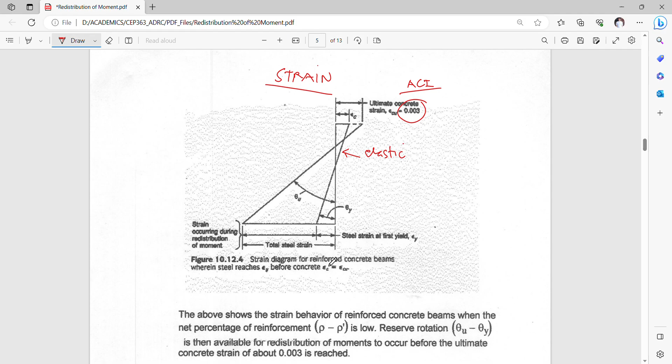So this is the ACI definition of your concrete strain during crushing. As you can see here, this is actually the elastic strain distribution wherein your epsilon c has not yet reached the ultimate value of 0.003, while your steel strain here may or may not reach the yield strain epsilon y.

This point at which your steel strain starts exhibiting the yield strain is actually the start of your inelastic behavior, on which we take note that ductility is measured from the point where this curvature Phi y is defined, and certainly increasing the value of Phi u, such that your Phi u minus Phi y is simply the measure of your ductility.

This is also the parameter used to compute for the amount of redistribution of your moments. So the amount of your redistribution is actually related to your ductility here.

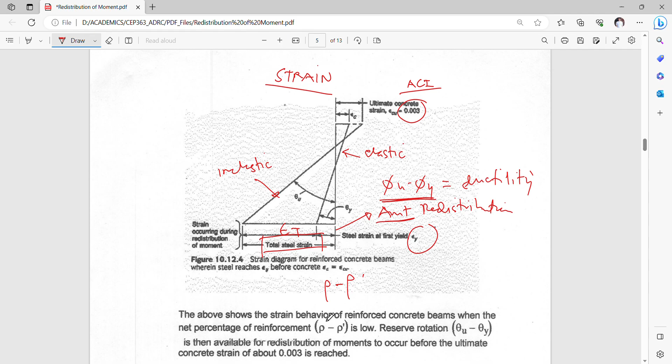Later on I will show you the difference between the two codes, defined on the basis of rho and on the basis of your epsilon.

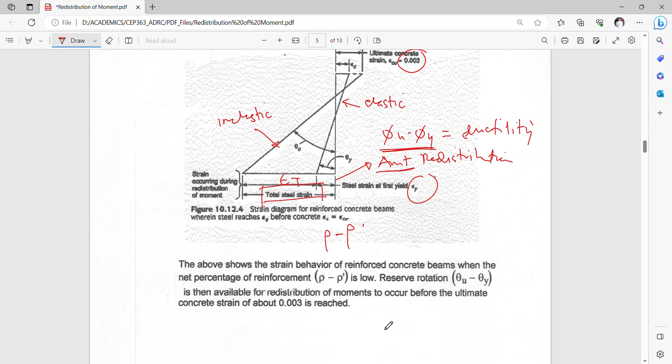So let's go now directly to what the code tells us. I have here two codes: this is an old code, and this is also an old code. The change from this 1999 code to the 2002 code serves as the transition into what you call the unified provision on tension and compression control members.

In these two codes, there is defined, on my previous lecture, a compression control behavior and a tension control behavior. For a compression control behavior, we are talking here more on a column behavior, while on the tension control, we are actually considering a beam behavior. I will be discussing this perhaps on a different video.

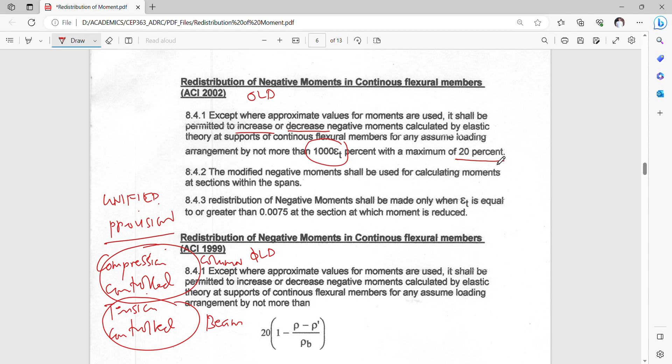Let's take first what the code tells us about redistribution of moments. For your ACI 2002, section 8.4.1, it's stated that except for approximate values of moments used, it shall be permitted to increase or decrease negative moments calculated by elastic theory for continuous flexural members, for any assumed loading arrangement, by not more than 1000 epsilon t percent, with a maximum of 20%. The modified negative moments shall be used for calculating moments at sections within the span, and the redistribution of negative moments shall be made only when epsilon t is equal to or greater than 0.0075.

So these are the criteria for us to be able to use the moment redistribution procedure defined by ACI.

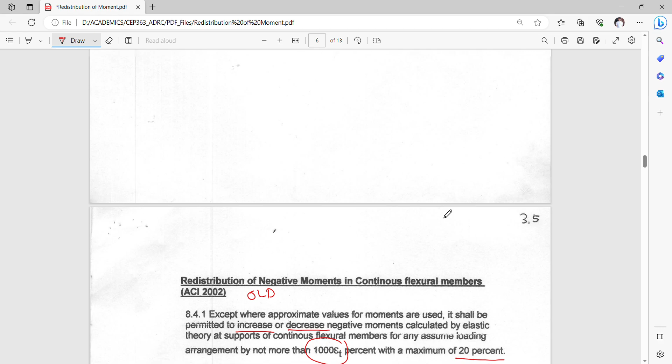In ACI 1999, a few years back, we defined the amount of redistribution in terms of steel reinforcement ratio. This steel reinforcement ratio, defined here as the main parameter, rho minus rho prime, was controlled to be a low value to allow us to redistribute the moment. The amount of redistribution, which is the counterpart of 1000 epsilon t here, is equivalent to this value in percent. So the lower this value, the higher the redistribution percentage.

So which means that we are just trying to make a more ductile design. When the design has a higher ductility in terms of the amount of reinforcement ratio, or in terms of the difference between the yield curvature and the ultimate curvature, then we can allow the redistribution to reach a maximum of 20%.

In this case, if this is 0, then we can allow this to be 20%. Of course, there's no way, but rather there's a possibility that your rho here is equivalent to your rho balance, when you have a balanced design, and your rho prime is assumed to be 0. So when this is 0 and this is equivalent to rho balance, this becomes 1, and 1 minus 1 becomes 0.

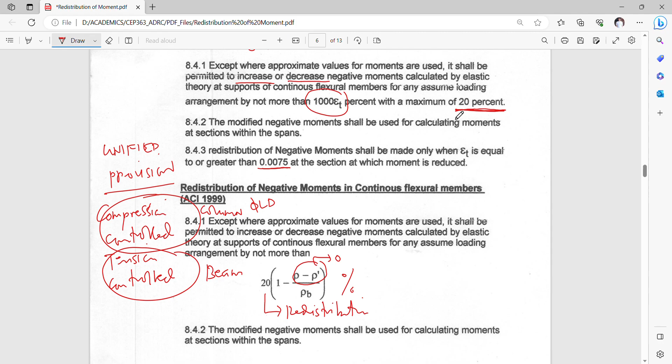So the redistribution of moment then becomes, in terms of percentages, 0. So is there a possibility for this to become 20%? Yes, if your rho and rho prime are the same, this whole value becomes 0, and then this is 1 times 20, so this becomes 20%, which is still the same as the limiting percentage given in our ACI 2002.

So the modified negative moment should be used for calculating moments at sections within the span, and the redistribution of negative moments should be made only when rho minus rho prime is not greater than 0.5 rho balance at the section at which moment is reduced.

So there is a restriction of having your rho minus rho prime to be limited only to 0.50 rho balance. So this is actually a basis of our seismic provision for ductility.

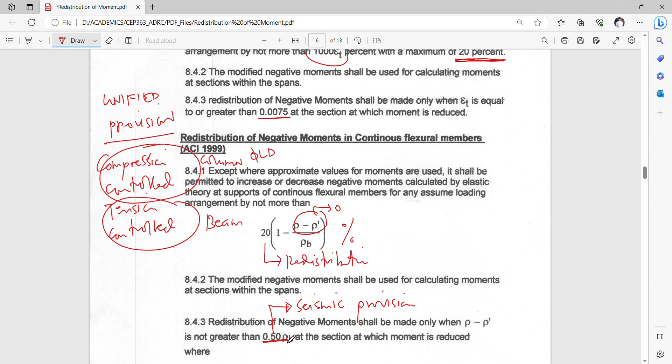So in our ordinary or regular provisions, this is 0.75, but in the seismic provision, we reduce that much more down to 0.50 or 50%.

And take note that rho balance is simply defined in terms of this formula, which is in English units. And for SI units, you just simply convert this to 600 plus Fy.

So we have here a graph of this comparison between codes in terms of your calculated redistribution percentage, for ACI 2002 and 99.

So the calculated available using the formula above, the 1000 epsilon t that we refer to above is simply this two here. So this is the calculated available for Fy equals 60 ksi and for Fy equal to 80 ksi. But for all Fy's and FPU, we can use this graph.

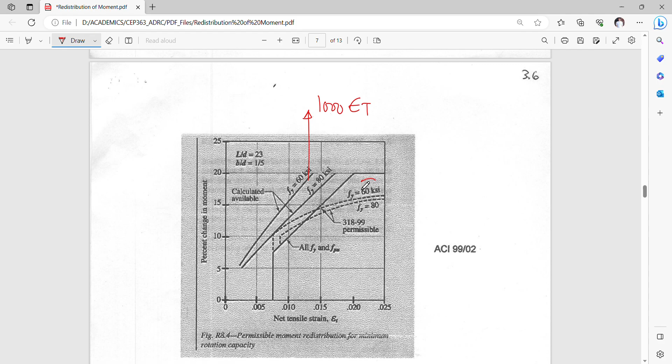But in ACI 318-99, there is a limitation, upon which this graph can only be used within the boundary given by the dotted line, specifically for Fy equal to 60 and Fy equal to 80.

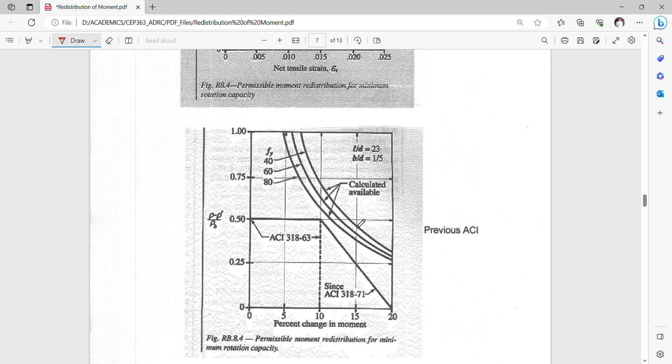So for the older version, ACI 318-71, we have those codes older than 99. So we have the calculated available, which has the basis of this rho minus rho prime over rho balance. So this is now calculated in terms of Fy equals 40, 60, and 80.

So take note that when you have a lower yield strength in terms of the steel, you have a higher curve that will give you better percentages in terms of the redistribution. This percent change in moment is actually the redistribution percentage that we compute using this formula.

For much older version ACI 318-63, we have this graph limiting our moment redistribution percentage only to 10%, and this is limiting our rho minus rho prime over rho balance at 0.50. So again, this is a seismic provision.

And then in ACI 318-71, they actually made some adjustment. So the redistribution may now exceed the value of 10%, and it can reach actually up to 20% when your rho minus rho prime is equal to 0. This can only be 0 again if your rho and rho prime are equal.

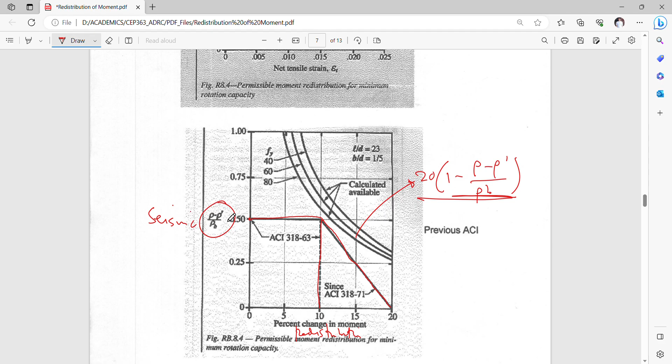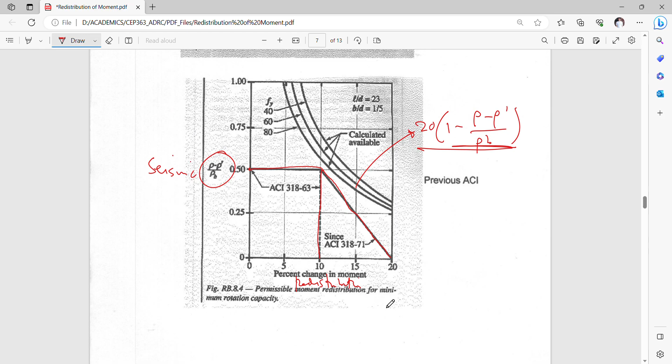So you can actually have the maximum value of redistribution percentage of 20%. So that is the code provides us with these rules to follow.

And in our next video, I will show you a general procedure on how to do the moment redistribution calculation using this formula. Thank you very much for listening, and I'll see you in the next video.